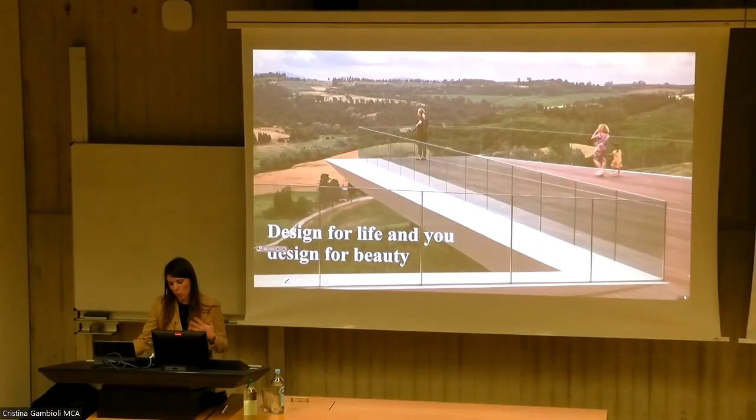We need to look at how we are working and what we are looking for when making this research. We are working with a group of architects, part of them artisans and part of them people using software like Grasshopper, because we think that with time we cannot just make architecture through artisans, through models, through the other ways we used in the past, using the model shop that we have in our office.

But now, when we have to respond to all the questions asked of us as architects to build big buildings and not just small things, we have to deal with sustainability, and sustainability means making a lot of research, being curious, being an explorer, and always trying to deal with new limits, new constraints, and to go ahead with all these problems.

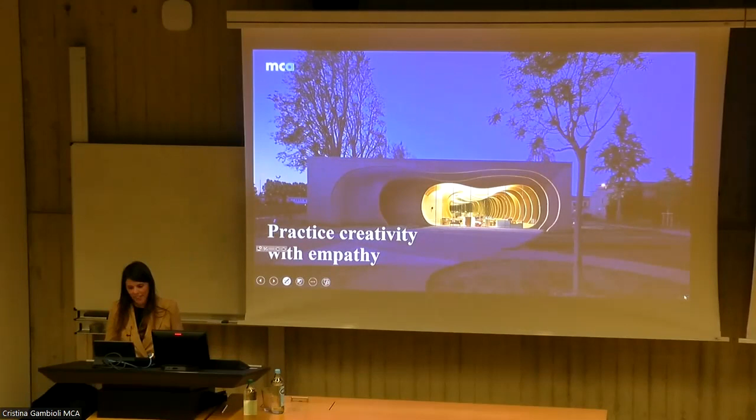creativity with empathy. What does that mean? Because for us, creativity could be something really dangerous, because it's a word that can be really crazy and furious, always about conquering new things. But of course, if we put these words together with empathy, thinking about what the clients want, what research we are looking for, what our goals are, and even what the people who will live there will need, then we can start our research and reach our goals. That's why we always have to deal with sustainability, looking from each angle.

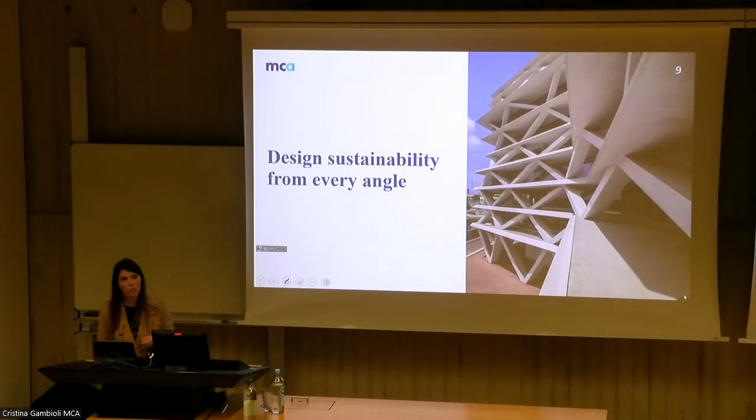So, looking from several angles, taking constraints and limits as a new challenge to find something new. This sentence is really important for us, because we always have to research the meaning of beauty, the beauty for our times.

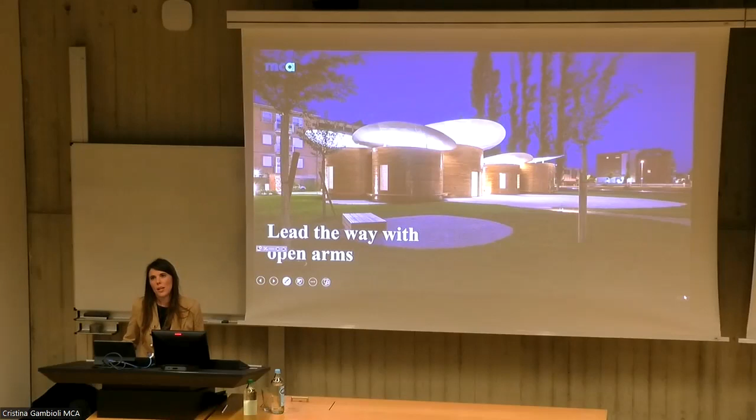So that means we have to think about building a timeless architecture. Something that in the future someone will look at and think, okay, this architecture was the response to what was happening in that exact moment, the perfect meeting between the shape, the problems of the environment, the people living in a place, and the nature. This also means we always have to go ahead and get new goals, new challenges, always open, because limits always push us to build better things, and we have to be curious as well.

During this time, the meaning of sustainability has evolved, and we have gone ahead a lot of steps, especially in the last years. But we have to always think that when we build a building, we are using energy, and when this building is lived in, it's using energy as well.

In the last years, we've made a lot of progress on the meaning of having a building that uses less energy during the time it's being lived in. But we didn't really focus attention, all around the world, on what it means to build something with less energy.

So we started thinking more about the meaning of vernacular architecture. In the past, they couldn't really use energy, so that meant they had to find materials in the place where they were living that they could use because they were already there, and they always had to find strategies that could work with the environment they had at that time.

Nowadays we have a lot of technologies helping us save energy, but in the past that wasn't possible. That's why we are always trying to be curious and do research into the meaning of vernacular architecture of the past.

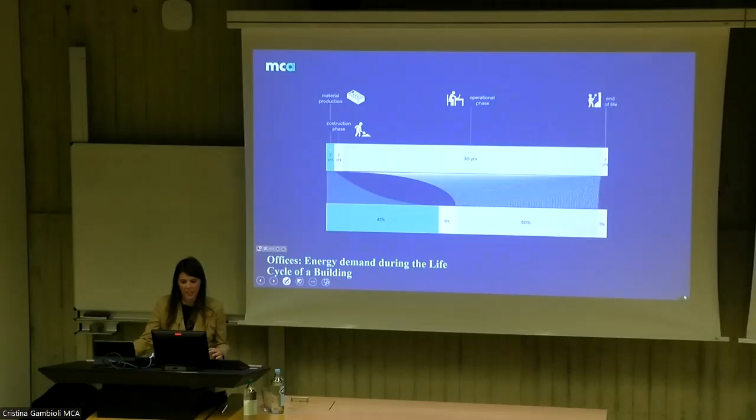We see that the ancients were always really intelligent, because they were really good at finding solutions to build buildings with less energy, and at the same time really smart buildings that didn't use energy even during the life of the building.

This graphic shows us that at the beginning, in the really distant past, they were building really intelligent, really smart buildings, CO2 neutral, because they were really using what was already there. Then there was a point when we started with technology and stopped building buildings that were so good — a big change happened.

Then in recent years, we are trying again to build up what was built before. That's why during our studies and development of architecture projects, we are always trying to go on a journey about what was done in the past — every project we do, we try to think about what happened before.

How, in the past, the people and civilizations that were here could maybe give us some thoughts about it.

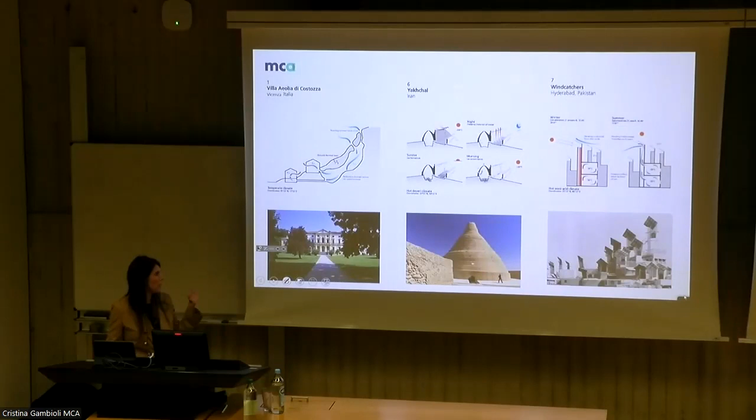We'll look in detail at the wind catchers in Pakistan, because they were the inspiration for one of our projects that I'll explain later. These are all examples of architecture that really used nature — they had empathy with the environment, and they were really well built.

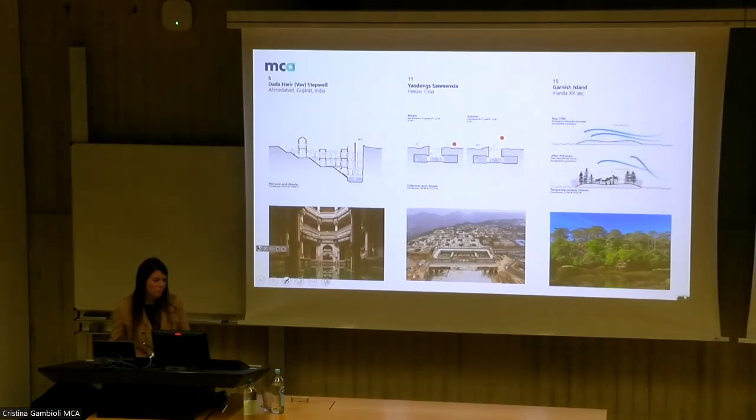That's why, even during the development of our architecture, in using creativity, we inspire our buildings on plants — trying to understand bio-principles, like how a cactus is made. It's in the desert, with a shape that's really particular, that kind of shades itself, so even if it's really warm, the sun can't touch the sides of the cactus. It has these dots that just catch water from the air, and that's why this cactus works really well in a desert environment.

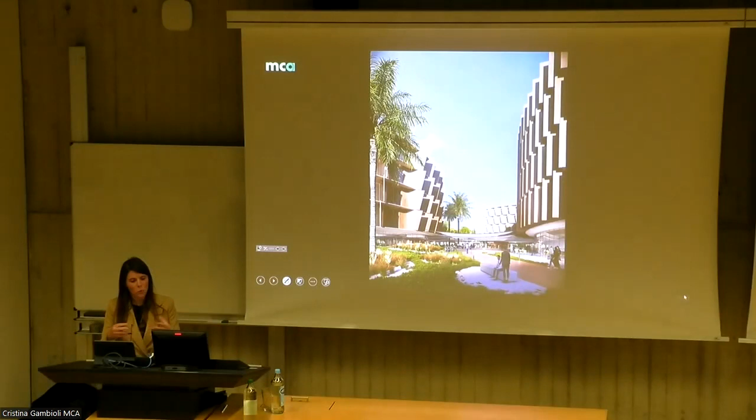We try as well to transmit this principle of nature into our buildings — trying to understand how plants adapt themselves to an environment, and transforming that into a building as well, using the same principle as the plants.

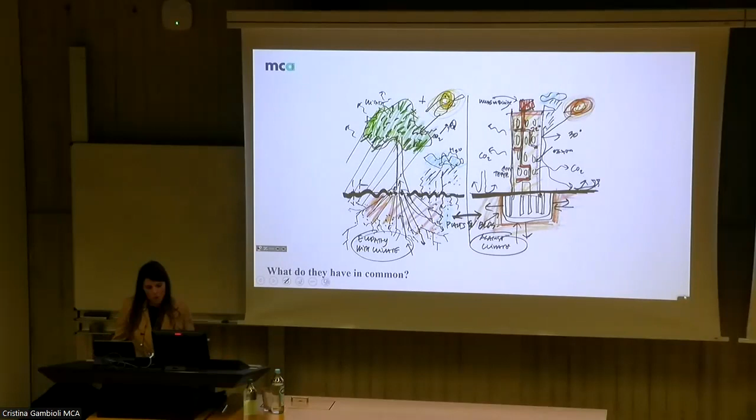And that's a little bit an overview about our philosophy, our methods, and how we try to keep working, being conscious that an architect is always leaving a footprint on earth. That's important to think about, even sometimes fighting against clients and other opportunities and business. But we have to think that these buildings will be there forever, so everything we are building and creating stays on earth forever. That's why we always have to make thoughts about what we are doing.

I will go now more in detail about some projects. As the first project, I will speak about the ARPAE headquarters. ARPAE means Regional Agency for Prevention, Environment and Energy.

When we started this project, the client specifically asked us for a sustainable office building, and they wanted really to meet the highest architectural and environmental standards. This building is in Ferrara, in Italy, close to Bologna, and was completed in 2018. It's almost 5,000 square meters, and it explores the relationship with performance, making it one of the first hybrid buildings in Italy.

It's just outside the city of Ferrara, and in this area we have a climate with two extremes during the year. In summer it's hot and really humid, and winter is cold and foggy. We can say that only in spring do we have a normal relation between temperature and humidity.

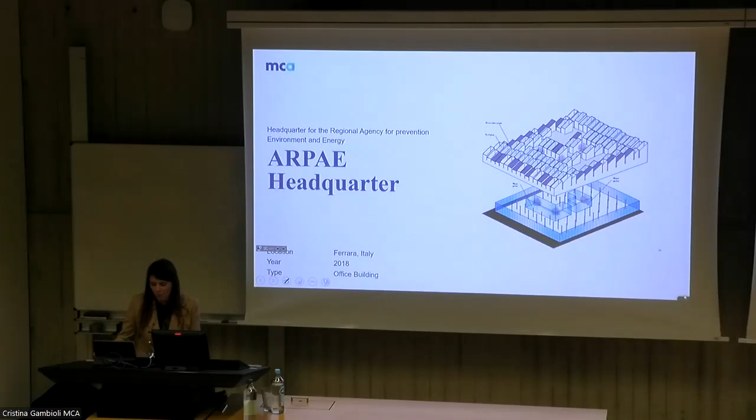For us, as I explained before, the definition of sustainability is not just connected with aesthetics, but especially the meaning is empathy with the place, with the climate, and with the people. So now I will bring you through the research that we did for this building.

We got inspired by the city of the wind, Hyderabad, in Pakistan, which really catches the wind. It's a city that was built in 1768.

We started long research, becoming curious and looking at all vernacular architecture. And then we came to this city, and we thought it could really be the perfect inspiration for our project.

We found out this city, as the name properly says, is a city that catches the wind, and this civilization was really smart. Without the technology our society can use nowadays, they invented really intelligent methods, using the shape of the building to get natural comfort inside without the use of energy.

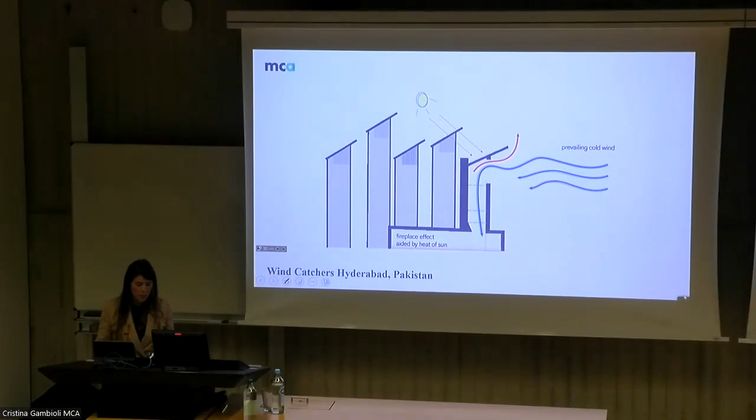Normally all these roofs are oriented toward the south, because in summer they have to catch the wind coming from the south, and in winter they have to protect, with this shape, against the cold wind coming from the north.

All these shapes have a sun shading system integrated on top of them. That means it's something a person can manually control and adapt to the necessity of the people living inside. So you have the possibility to use natural elements and adapt them to your needs, using this tool that lets you really catch them and bring it inside your home.

Normally they used to open these mangs during the evening, after sunset, because in summer after sunset you start to get a little bit of colder wind. This wind goes really fast inside and refreshes the whole house. Normally they stay open till 11 the next day, giving you during the day the possibility to close them and protect yourself from the sun.

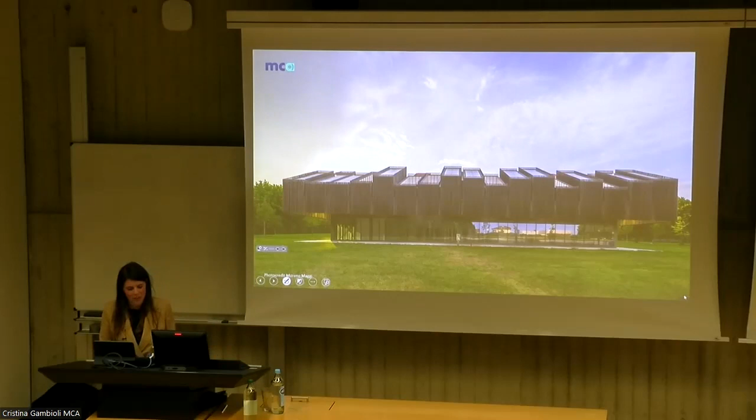We are pretty happy because we are really getting the goals we wanted at that time. As architects, we have a responsibility for what we build, and we have to try to build things in connection with nature, shaped by nature or ancient technologies, while mixing in today's technology responsibly and always exploring new opportunities for development.

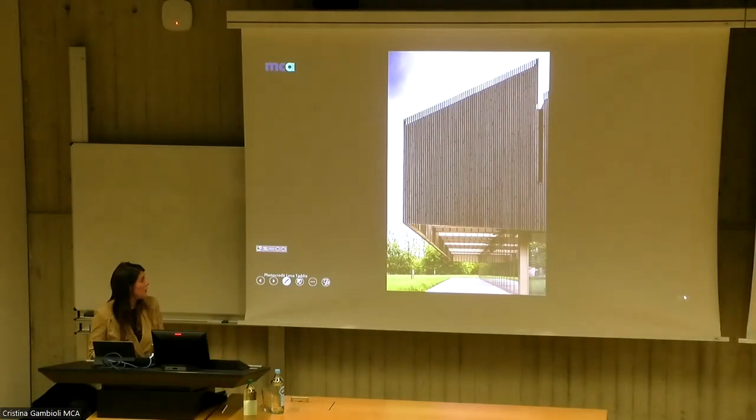The structure is completely made in wood, not just the facade but the whole building. Just another detail, and as you can see, it really matches the nature around it.

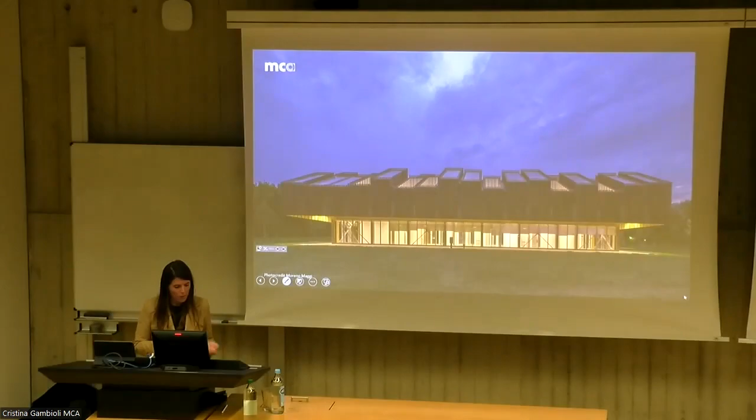As a connection with the building I've been speaking about, I'll introduce a new tower we're building in Milan. I don't know if you've heard of the Unipol Tower—it's in Porta Nuova, in the new development area in the city center of Milan.

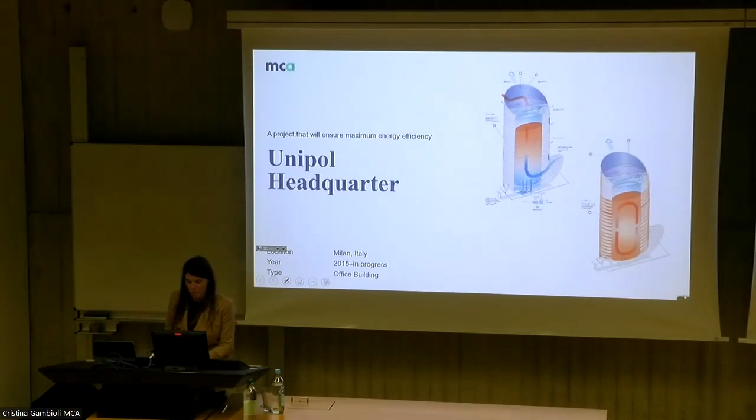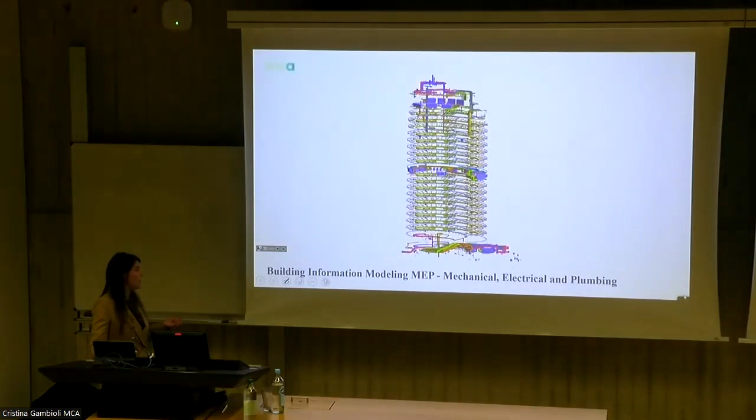This is close to the vertical forest. I wanted to quickly introduce this because it uses the same principle I spoke about in the other building, ARPA—it also has an interior patio.

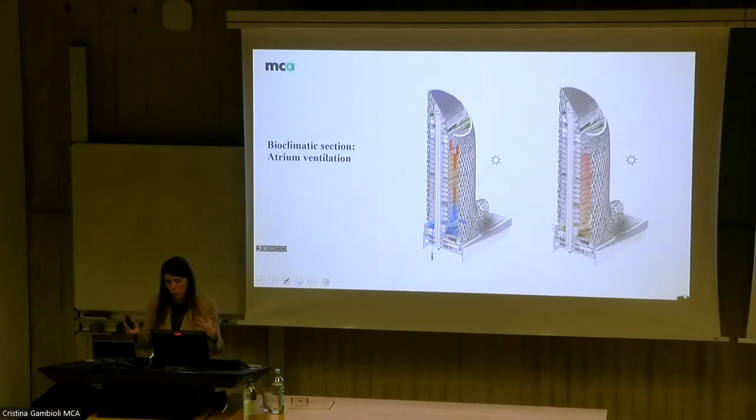We tried to reproduce at the same time, even in this building, the possibility to have a chimney effect. So we built a first layer of facade that is not a warm facade, and inside we put a patio that goes across the whole building from the main entrance to the top.

This patio takes the warm air from the bottom and brings it to the top, carrying it away. The other part you see from the other side are just offices, and exactly at that point you have the real facade.

So the space between the real facade of the building on the left and the exterior facade is theoretically a patio that you don't have to heat, which means you save a lot of energy because it's not a place you need to use energy to make comfortable. That's important because it was a really big space, and we didn't want it to use energy.

We took on this challenge and repeated this chimney effect, giving us the possibility to have a really huge atrium that goes across the whole tower, about 130 meters. As you can see, we fight for our beauty while keeping environmental strategies and sustainability strategies in mind.

On the top, we decided to have a sky garden, a kind of hanging garden that is always refreshing, bringing nature inside the city.

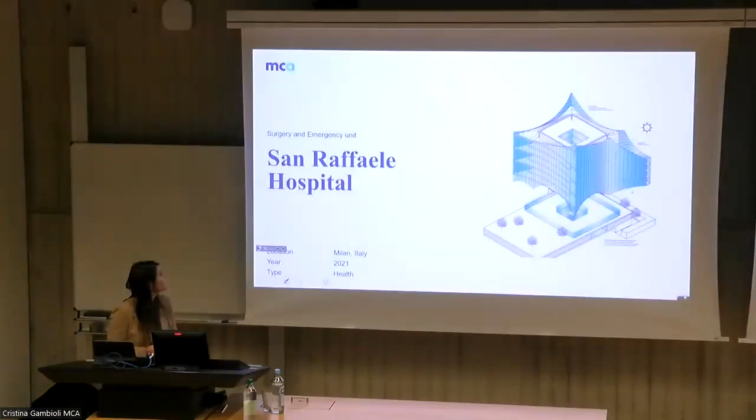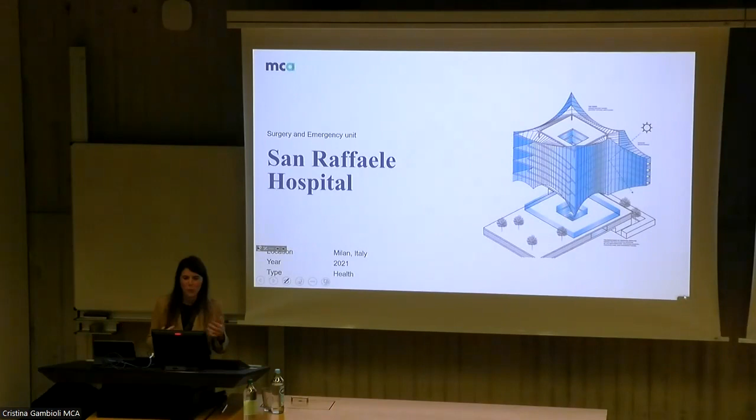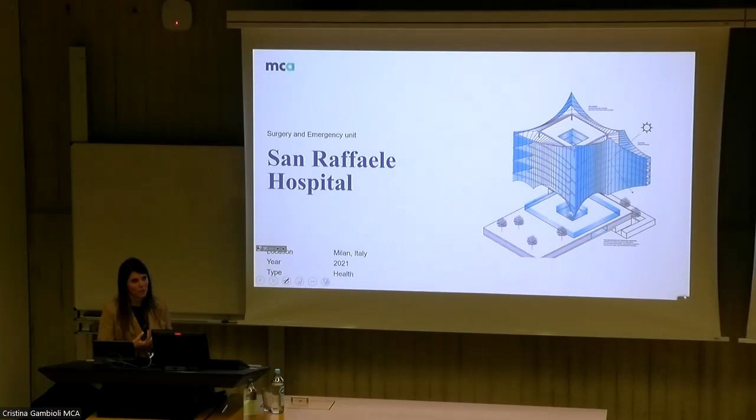To give you an overview about the meaning of sustainability across a lot of our buildings, I will quickly introduce the Hospital of San Raffaele. It's already built, in Italy, in Milan as well. As architects, we face a lot of challenges. We were speaking before about an office building, then a tower for offices, and this one is a hospital—it's really important to always fight for beauty, especially in a place like a hospital, because it's bringing people together.

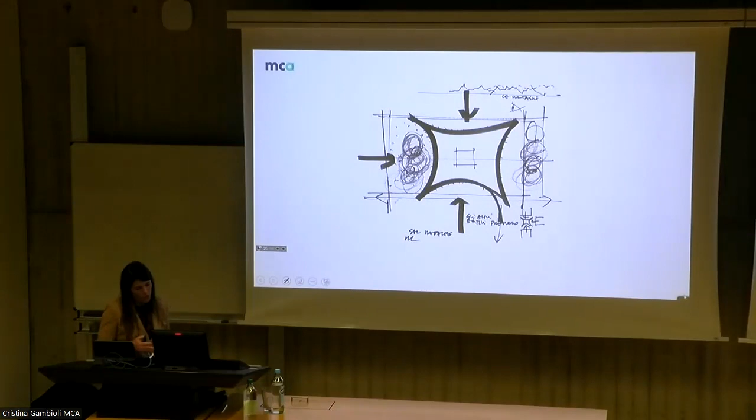We developed this concept for the hospital, starting from the shape and something that could bring something special to the building. The idea was to represent an iceberg, something frozen inside the building. But we also wanted to use environmental strategies, and that's why we used this facade with a lot of vertical depth elements to make shadow on the facade. That's always a big deal when you're building a glass house, because glass, especially in Italy, is really difficult to deal with—in summer it's almost impossible to live inside, and you need a lot of energy to cool it down.

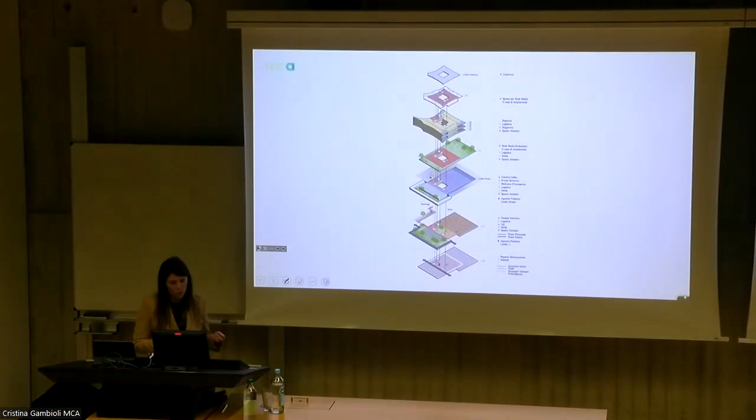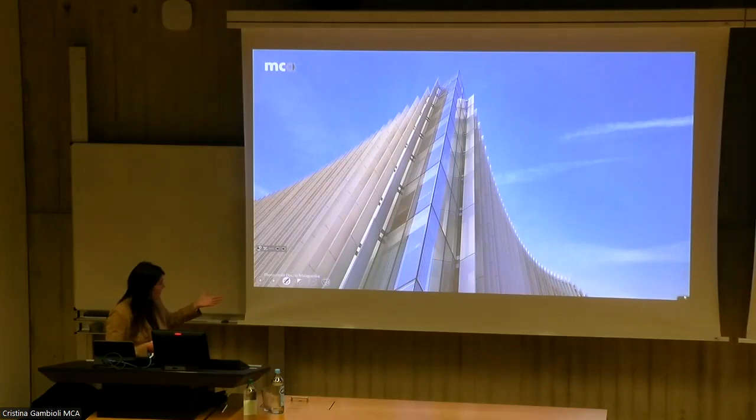We've been looking again in recent years at the renderings of this building, which we planned almost 15 years ago, and we were really surprised, because the building turned out far better than the renderings we had done before. Often it's the other way around—renderings are a way to dream, and when we actually build it, it's always really difficult. But here we have to say that with this building, we really reached our goal, and we managed to make something balanced and well done for the goal we set for ourselves.

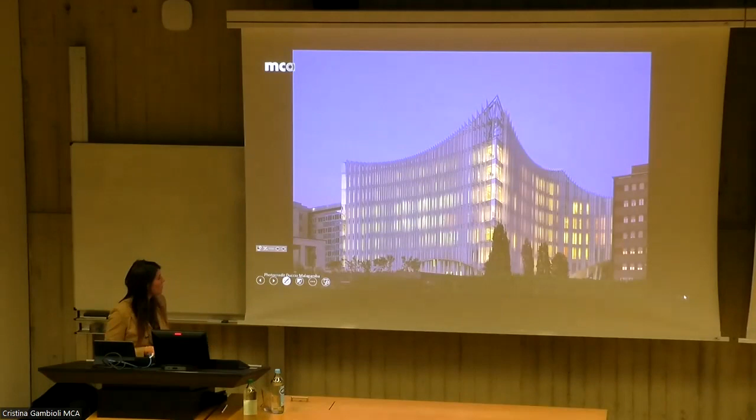Now, to change the scale of the project a little, I wanted to show you a really small residential project, to understand how we use this technology even in the residential area. This building is in Monza, a city close to Milan, in a really important location because it's on the main axis of the Villa Reale, the historical palace. It was really difficult because we had to deal with historical reality, and a lot of limits, since in Italy there are many controls about what and how you build, especially in historical areas.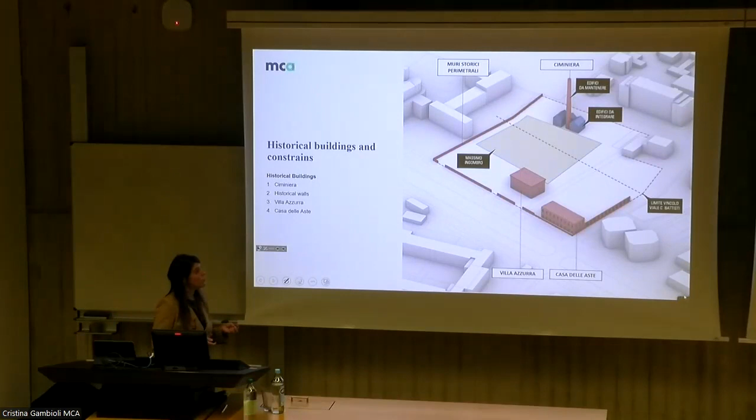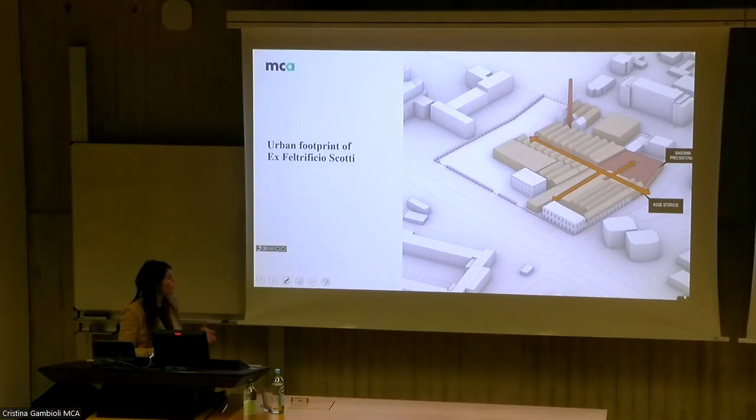So we started studying the urban footprint of the factory that was there. And we decided, okay, we added a couple of axes and we added a principal shape. And so, okay, we understood what we could build there.

For sure, we had to give a lot of importance to the main buildings on the front because we have to keep the historical reality. And we had to keep the green, with the special trees, exactly as it was. So we decided that was the shape we could build, because it was really limited. And so we decided how we can really create a living garden here, something where you have the feeling that you are in an historical garden, but with new technologies and new, maybe organic, shapes.

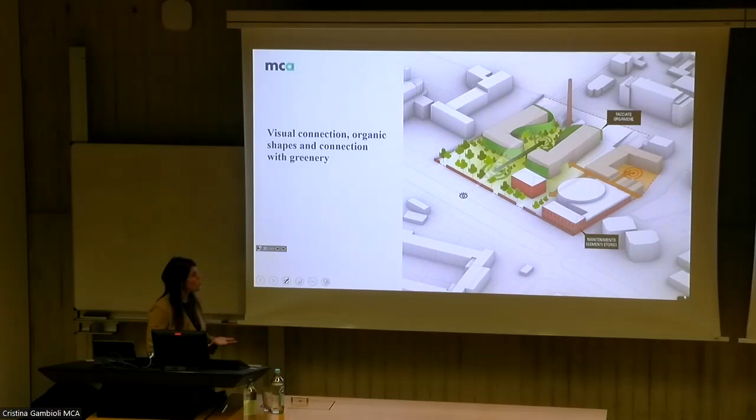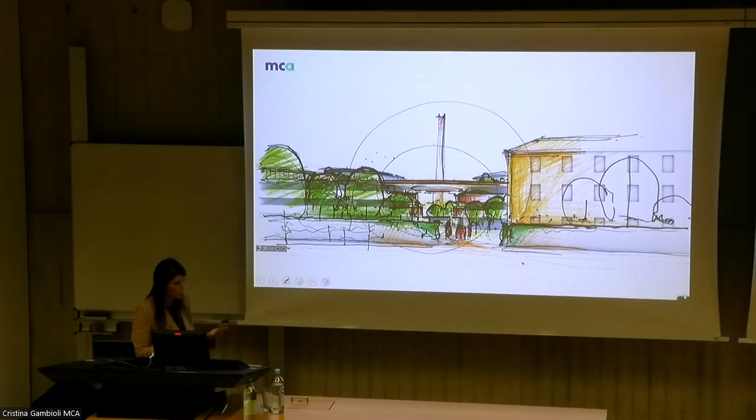And so that's why we started to think about it. We have to keep the historical walls. We have to keep these green trees. We have to keep the Villa Azzurra on the right. And we have to build a building that doesn't take away importance from this main chimney that we have in the middle. And we want to keep as well the industrial reality, the industrial memories.

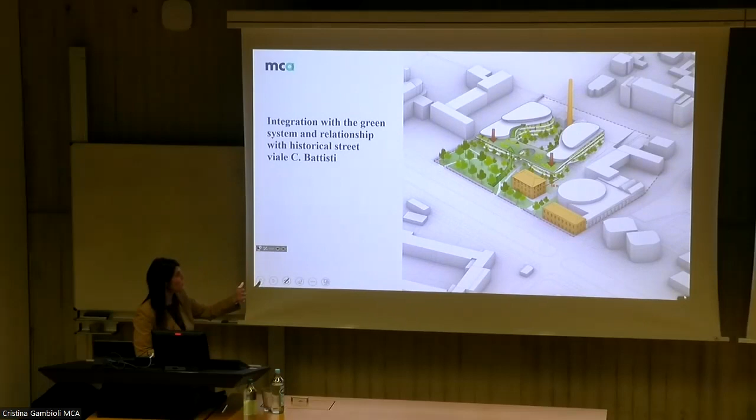So we started to move the volume and began using organic shapes as much as possible, because we wanted to reinterpret how nature is made. That's why we decided to make this organic courtyard in the middle. And on the other side, we didn't want it to be too high, because from the main street you could see that the building is too high, creating a not-so-good impact. That's why we decided to lower the upper part of the building and keep only the other side higher, as a way to hide it a little bit.

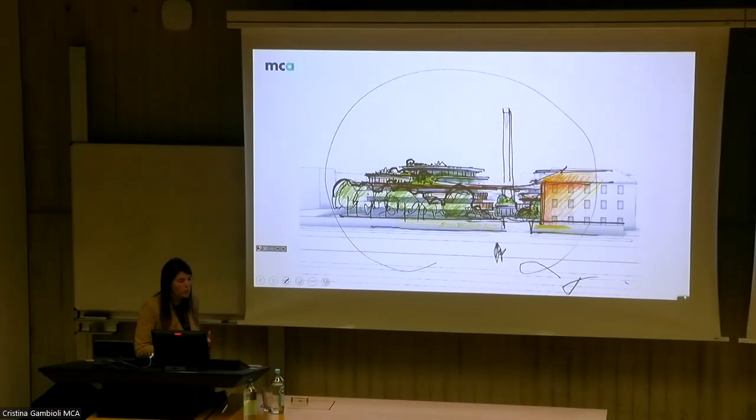And then, another way, we wanted to have a picture where from the top you have the feeling that you are in a garden, so that you are not really making an impact on the place where we are building. So we really wanted a kind of green carpet. That's why we grew this idea of having some private gardens, and of course some public places, this part connecting the two buildings, trying to have as little as possible a visible footprint of architects and humans of nowadays.

And that's why, after all this research, we are trying at the moment, since it's a construction site, to build a living garden and some hanging landscape, trying to reproduce what was there before, with as little impact as possible with this architecture and this park in front of it, and also trying to have several layers of garden. The first garden will be accessible to everybody. The second garden, inside the courtyard, will be accessible just to the people living there. And then the other gardens on the tops will be more for the people living in these apartments.

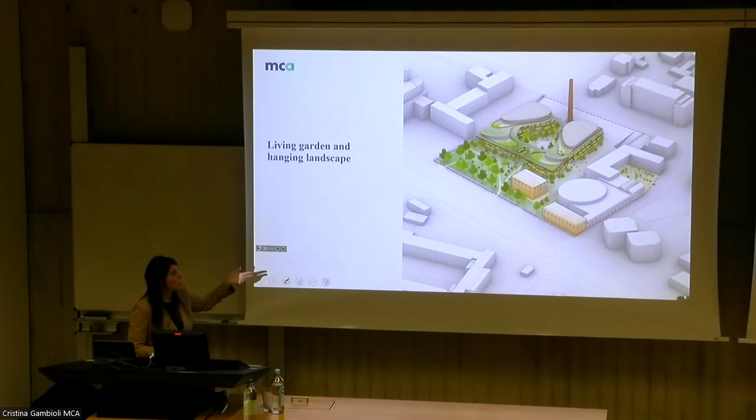Then, of course, we are dealing with necessary new technologies, and on top of the two parts we had to put solar panels. But as you can see from the top of this picture, even in comparison with the parts of the landscape around it, we try to connect the parts on the right and on the left with as little touch as possible to what was happening there before. That's the footprint of the building we are doing. The part in the middle is already at the construction site, and on the right part we are still working, because we have a second stage.

And so about the sustainability concept, I have already explained several of them, but we can make a review. We are trying to work with deciduous trees, so that means that in summer they will be full of leaves and will make shade on the bottom of the whole park. And the other way around, in winter, they will lose the leaves, which means you will have more connection with the sky and the sun can pass through them.

Of course, we have evaporation and evapotranspiration effects from the vegetation, because in summer it's really important to have a bit more humidity made by the vegetation. We also have evaporation of water thanks to this small water park that we built.

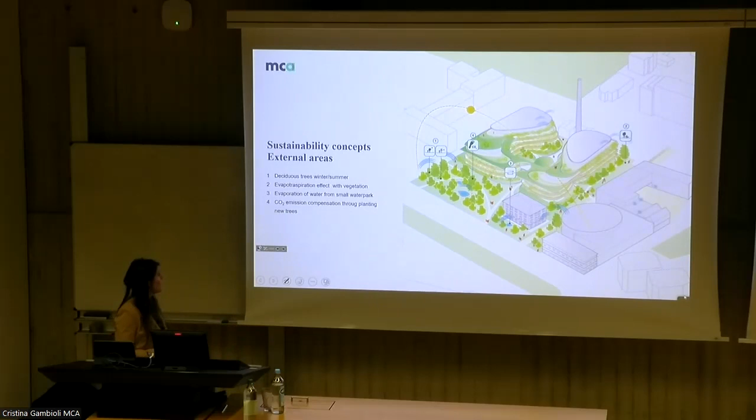In this main entrance of the building, we are trying somehow to make a CO2 emission compensation through planting new trees that, as you have seen in the pictures before, was completely razed with no trees.

And about the building itself, we will have a facade that is really shaded thanks to these big, generous terraces. The material of the terraces remembers the nature of the place and the industrial reality, using cotto, or bricks.

Then we will have solar panels on top of it, natural ventilation, reuse of meteoric water, and the regeneration of existing buildings.

For example, as we said, the Villa Azzurra, the chimney behind—it's always something we consider when regenerating existing buildings. We are not creating new ones, and we don't have the problem of how to deal with the waste of the building we are demolishing.

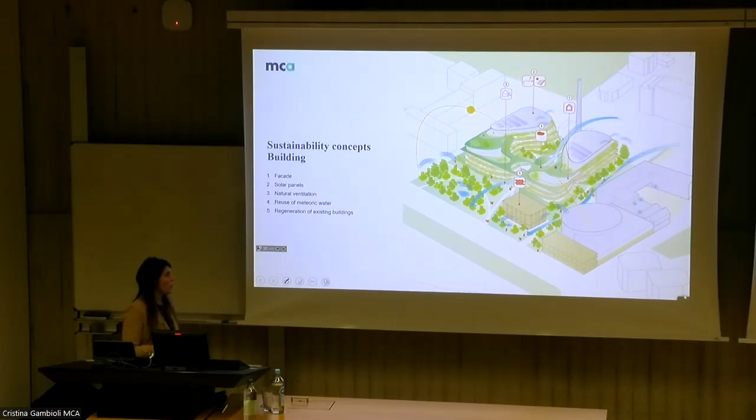This is how we work. As I said before, we still try to work as artisans, so we do a lot of models until the moment we find the perfect shapes. And that's the main picture of the building from this main road.

And the top view of it as we are building it. And this is a view of the terraces.

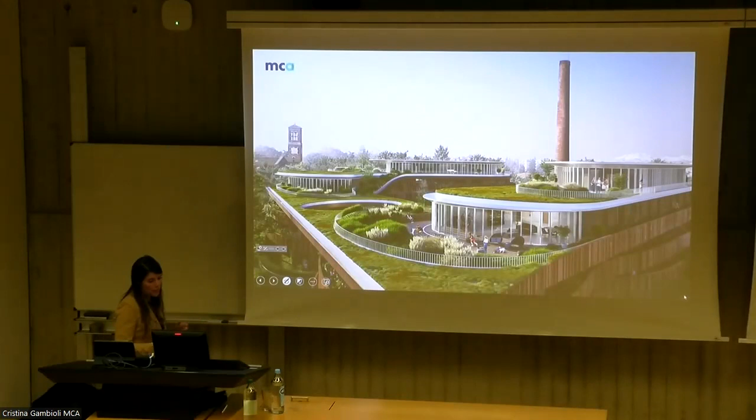Of course, all this glass facade will be provided with shadings to close them and give more privacy, while at the same time protecting from the sun in summer.

We also had to study the small building around the chimney that was a restoration. We try to always use red brick material, inspired by the tones of the chimney. And we try to keep the volume as pure as possible to remember the industrial reality of this place, but shape it in contemporary ways.

This is another picture of the interior courtyards—when you are working there, you have the feeling that you are embraced by all these shaped balconies.

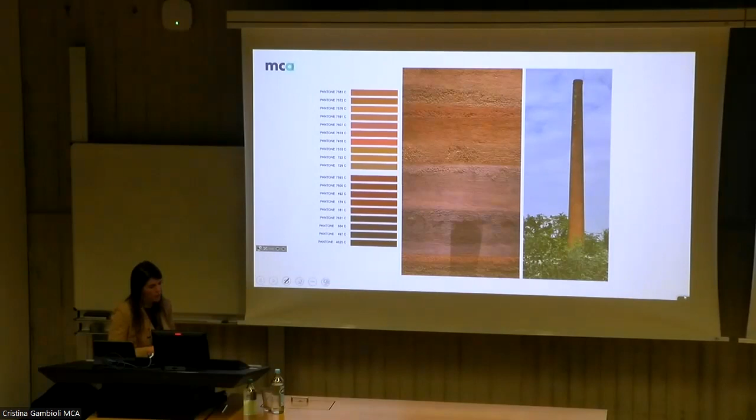This is a study we've been doing with the chimney to find the perfect matching colors for all the balconies, and to have these ceramic parts of the balcony that are really deep, because that helps so that when you are sitting inside, you can look through them.

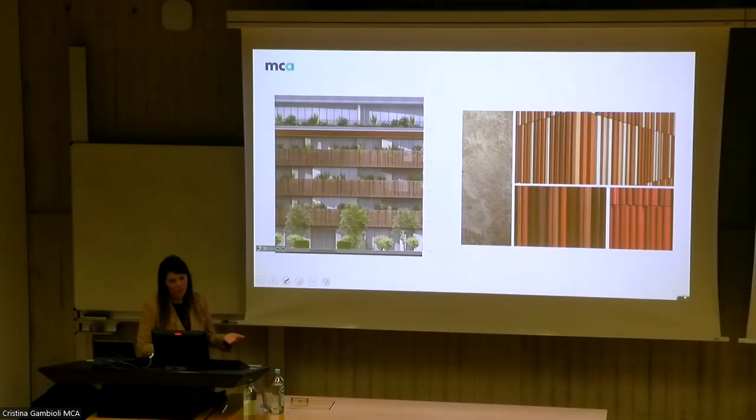But since they are all curved, when you are walking at the bottom of the building, since they are really deep, you cannot see inside because it's like they are covered. This way you can give privacy to the people living there.

These are some sections and some color palettes that we have been using. And finally, this is the final picture.

This is something I will explain really fast—another project that is finished, just to show you how we work across several types of buildings.

This is a cultural building in Milan, and it has already been built. It's under the earth and under a historical building in Milan, so that was a really big challenge.

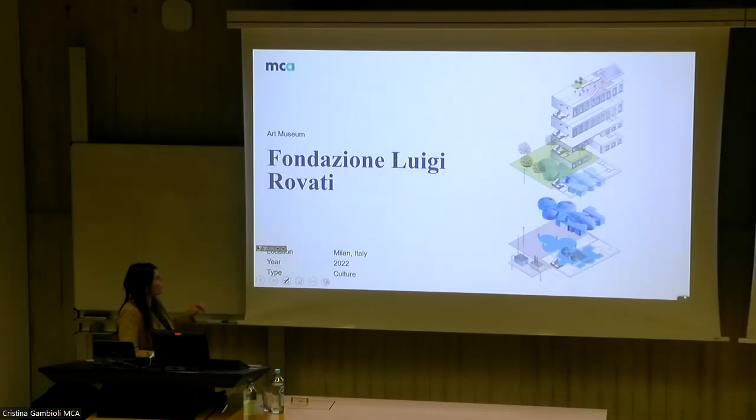Our client told us they wanted to have a private collection of Etruscan vases and Etruscan art. We had to find the right concept to interpret this and bring all these vases into the right place. Of course, that part was really focused on the experience of the visitor going there.

So we tried to understand how we could place these sculptures in the right way, to make the person going through observe them in the best possible way.

And these are some studies we've been doing, even studying Etruscan architecture, trying to understand how we can deal with this vernacular architecture that is the origin of the vases and the art we are putting inside this building.

So we started to make models to understand the perfect shapes. We sometimes mix methods—making them with styrofoam, then with the computer using parametric software, and then building it again. That's always a really important process for us.

Even the architect Cucinella always uses models as a kind of communication tool between us, to understand if we are going in the right direction and to experience the building as much as possible.

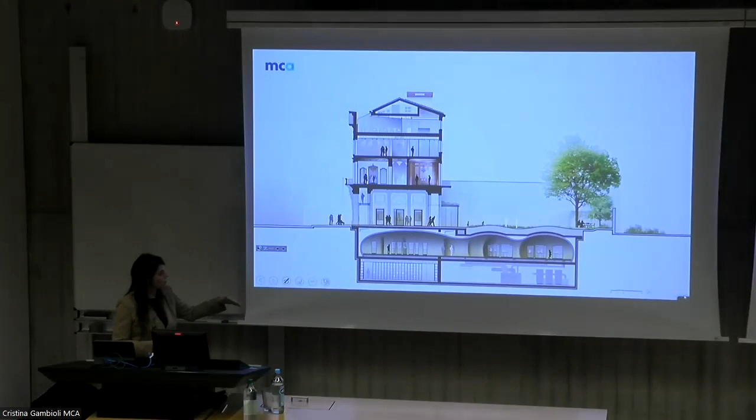This is the part of the museum that we had to restore. We tried to use more contemporary colors, but keeping always the essence of the historical building. And then under the land, as I explained before, we have our museum.

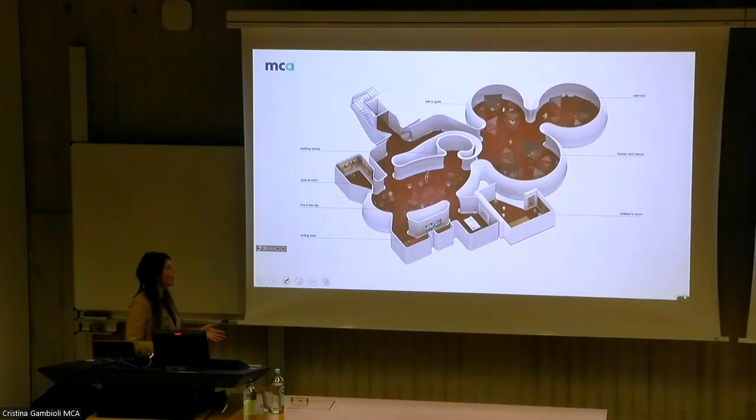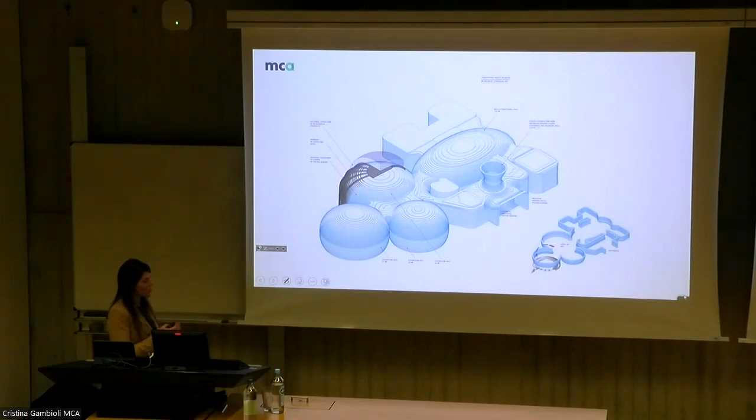So the visitor arrives there, takes some stairs, goes to the bottom, and has an experience about what is happening there, trying to live again how the architecture of the ancient civilization was. We made everything by stone.

We use software to cut all the stone this way to have this effect. We try to keep everything as clean as possible, and we use some system to bring light inside as well, from this garden.

And of course, it was a perfect study about light, how we could admire as much as possible all these art pieces using natural light and artificial light, and trying to find the best balance to give the sensibility of some vernacular architecture.

Then I will introduce the small project, a church that we have been building in the south of Italy. It's a really small town, and it was something where we were like, okay, we have to do this small church.

How are we gonna do it? It should be something small, but following all the rules of the Catholic religion. So it was a challenge as well.

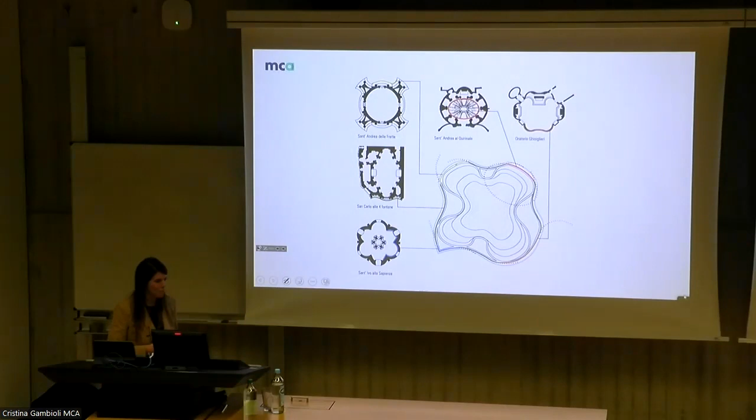So okay, we started again studying architecture, starting from the best masterpieces in the world, and trying to find the perfect shape. And then it was a surprise, and we built that thing.

Of course, we had to keep some religious signs because we couldn't avoid putting them, and that's why we decided, for example, to integrate this cross with the shape of the architecture and to make hidden the entrance of the building. That was something you have to find, and to keep the volume as clean as possible.

It cannot be on the same level as the visitors of the church, the Catholic people going there. You need always to have a cross inside. And as all the architecture always does in all the churches we have been seeing along the years, the light is the most important thing you have as an architect to play with.

Because we really wanted to have a filtered light, something that when you are inside, you really have the feeling that it's something special, and you are really having this connection with the sky, with the light, and with what's happening outside, emphasizing the meaning of the religion.

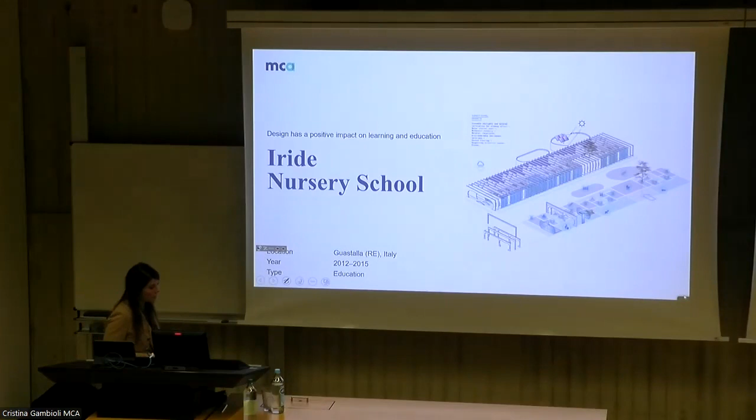A participatory design project is this Iride nursery school. Maybe you've been hearing about it because it's really famous. We started from the fairy tale of Pinocchio that everybody knows, and the experience of going inside the whale at the end of the fairy tale.

We had to make this nursery school, so we thought about what's the most important experience a kid has when he's a child, and what is the spirit of the fairy tale. We remembered that when Geppetto was inside the whale, it was a big issue, a big problem, and it was something that for sure shaped our childhood. So we started to think that we want the children going to this school to live something important for them.

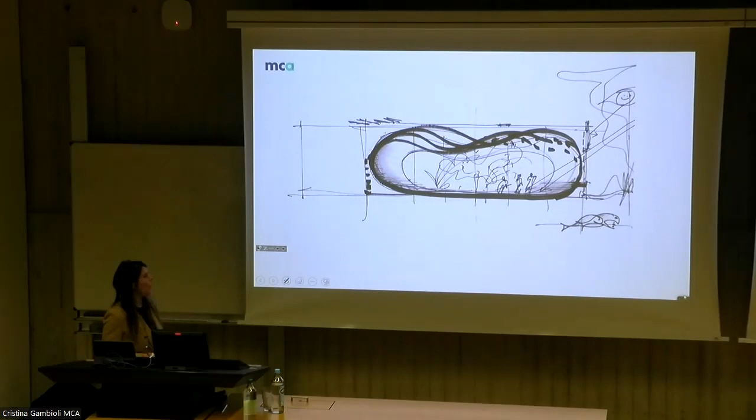That's why we started to develop our architecture based on the fairy tale of Pinocchio. We made some sketches with Mario. We started speaking with a lot of teachers to understand their methods, how they want to deal with the children, new methods, and to shape the architecture with the leads of the teachers. After a lot of dialogues with the municipality, the teachers, and the children, playing with them, we built up this building that should remind you of the whale and the story of Geppetto.

We are playing with light. We are making everything in wood, in the middle of the woods, so it's something that gives you a strong connection with nature. You are inside, but you have the feeling that you are outside. And when you move from one side to the other, you are really connected with the shape of the belly of the whale.

And somehow we also made this floor that was coming up to help the children play as much as possible and really live this experience of being inside the space. And of course, we had to deal with a lot of design elements and things that are necessary in a kindergarten.

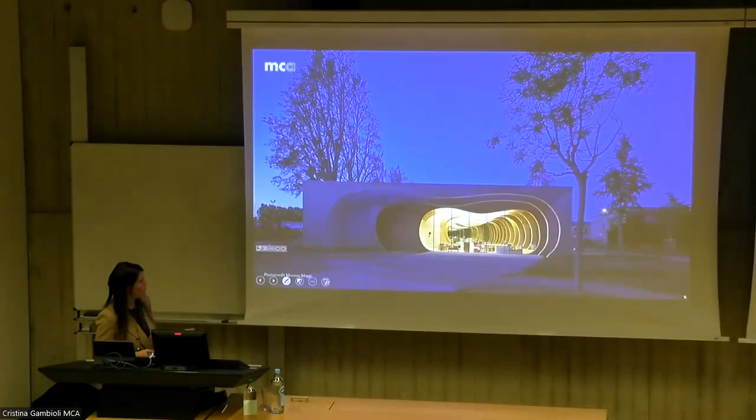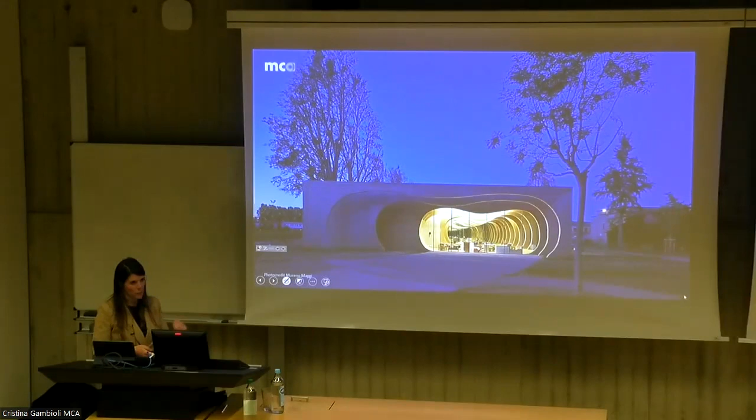At the end, we came up with this building that isn't so big. It's a small thing, and it's already pretty old. But still, we think it's helping us because it's a little bit the essence of how to build something that really has a strong empathy with people.

Now I will go to the last project. I wanted to show you that inside MCA we have an R&D, Research and Development department. That's really important because every time we start a project, we keep the concepts that R&D is developing. All the time, our unit is looking for new vernacular architecture, new technology, new ways of having a connection with the place where we are building something.

That's why every competition, every contest, every new client that comes in always goes through our research and development unit. Not all architectural firms have a unit like ours, because of course it's an investment from our company to have this unit, but for us it's the only way to really build something useful or try to leave a good footprint on Earth. That's a little bit our mission, because we always have to think about what we are building. We have a social responsibility, and we always have to think about what we are doing.

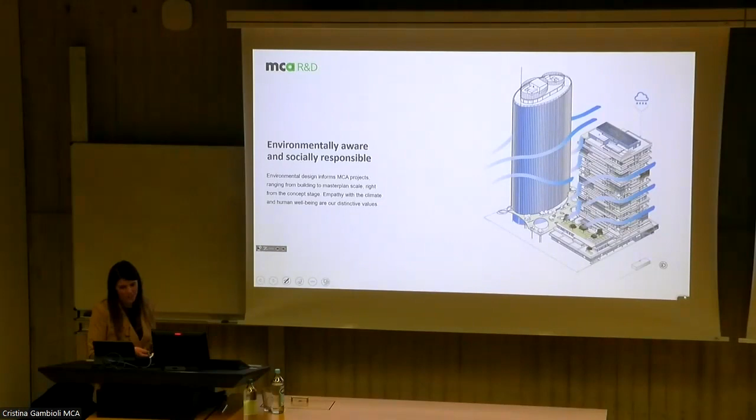Now I will explain in more detail the project of TECLA, which was also really famous last year. It's not a project, I have to say, first of all, but a prototype—a prototype of an eco-sustainable house, 3D printed entirely from raw earth. As far as I know, it should be the first prototype built through 3D printing technology using raw earth. MCA, together with WASP, a worldwide society meaning World's Advanced Saving Project, completed this prototype 3D printed with local earth.

This approach started from an innovative and pioneering collaboration between the two firms, and we worked closely throughout the project design and construction possibilities. Even in this project, we thought about how we could bring vernacular architecture and its technology into this prototype, into this process. We were inspired by the history of one of the cities of Italo Calvino—maybe you've read some of his books—one of the invisible cities. For this building, we drew inspiration from the city in continuous construction.

Why TECLA? Because the name evokes this strong link between the past and the future. We are combining a material that was used in the past in all vernacular architecture, something that should remind you of something really timeless, and we are building it with the technology that we have now in the 21st century. So it was kind of the perfect mixture between our researches. That was why we were really happy about developing this project, because it was really a good connection.

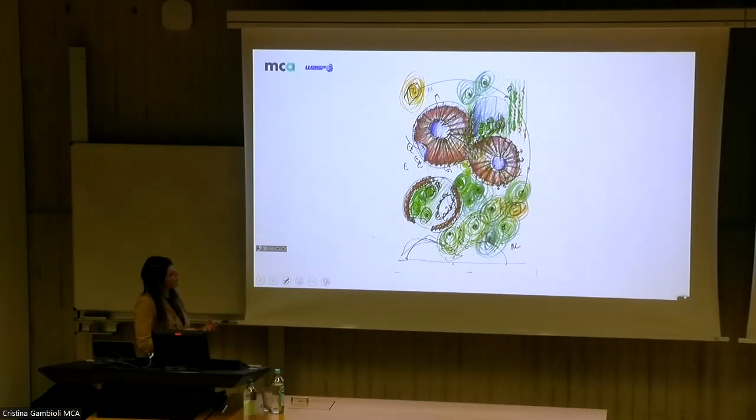And then as well, of course, it was important to understand how we are going to build it, so with which kind of earth mixture we want to use. And so we started to think about not just directly building a house close to Bologna in Massa Lombarda, but we thought: okay, let's try to think that we want to build 4 houses. We are going to develop just one as a prototype and build it, but let's think that we want to make one with hot and arid climate, another one in Mumbai with hot and humid climate, and another one in Bologna.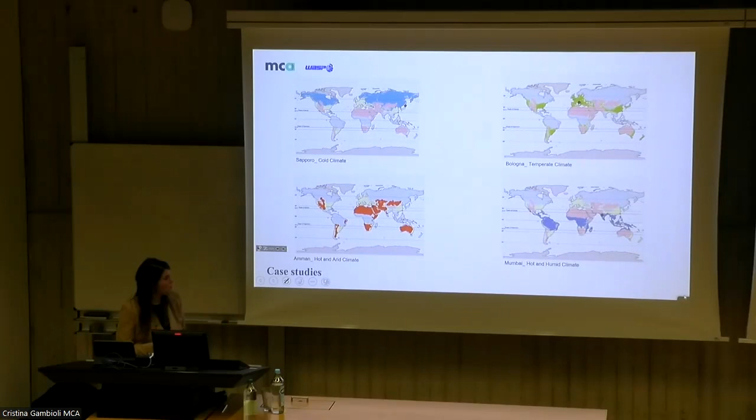Together with our School of Sustainability that we have inside, we started to make a lot of studies about which shape would better fit with each climate. That's why we developed some shapes that will work better for that climate. The one on top is the one that we chose for Bologna and for this kind of climate. That's why we started to reproduce it, to understand some focus about how it could theoretically work as a city for it, or a theoretical small development of it.

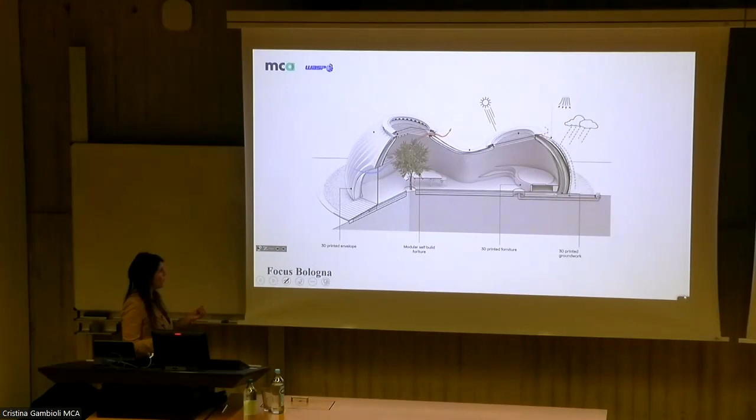And then, of course, something we had to think about as well was that we had to 3D print this envelope. So we had to think really about how the wall of this envelope would be made — the frequency of the infill pattern inside, the depth of the walls, and the part regarding insulation as well, and all this ventilation part.

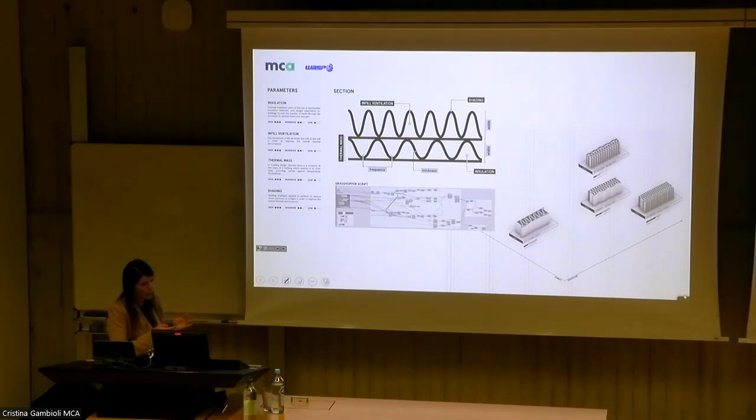So we made, together with the help of Grasshopper scripts and WASP, of course it was a big challenge because we had to think about the structure, since we should make something buildable, at least for a prototype. We had to think about the shape that brings a plus to building it, and about thermal mass, ventilation, insulation, and shading as well. We made several tests and found the perfect balance to have all these elements together in the same thing.

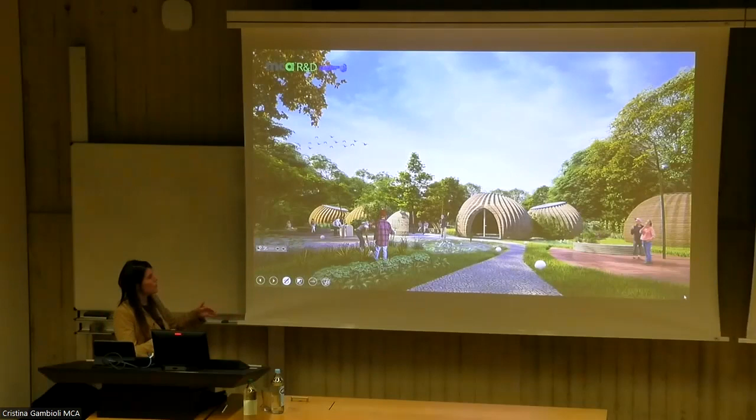This was a render we made just to understand how it would be. We did a lot of tests together with WASP to have something that could be built really fast with the technology they had and everything. So it was a little bit of some ideas.

Then together with WASP, we developed, or they already had, a machine with 2 arms that was building at the same time one part and another, because it was really important for us to win the challenge to build this house in less than 200 hours. And we made it. We are still studying more about this house, but we think, or we want to think, that this is just one of the first steps we are taking as a society to develop something new, something that could be challenging for this century.

I will put a small video, I think it's 1 minute, but it will help to understand how we build this house and how the wall is made and everything, as I explained.

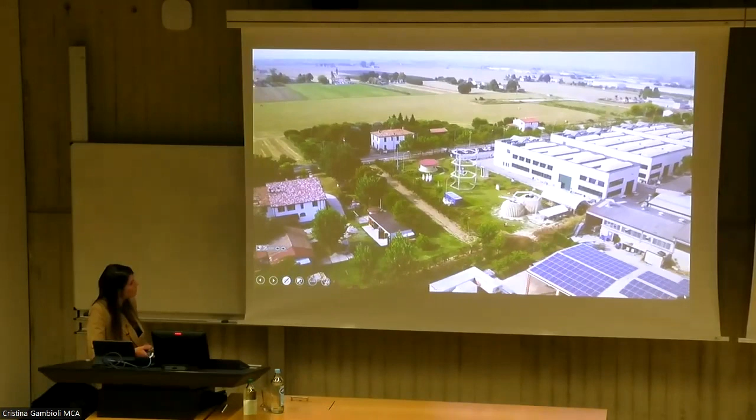So that was our final prototype. It was this home of 60 square meters with the kitchen, the living room, and a bed as well, and all the services.

We tried somehow to build the furniture inside when it was possible, using 3D printed raw earth as well, for example the bench you can see on the right or bottom part. When we had to use furniture, we didn't fully reach our goal because we couldn't 3D print all the furniture inside, but at least we aimed to use some furniture made with recyclable materials, or reused, to keep this circle closed of recycling and reuse as a circular house model. That was really important for us, to transmit this message of trying to build something that could be reused.

The mixture of earth, as I said before, was studied to understand, even for each climate, how deep and how thick the walls should be, because of course every earth from every land, from every singular place, is not the same, and we used it as such. That's really important, because in this concept we use a material that was already there, and if tomorrow we don't want this house anymore and have to destroy it, we can destroy it, and nature goes back to nature, without a bad impact on our environment.

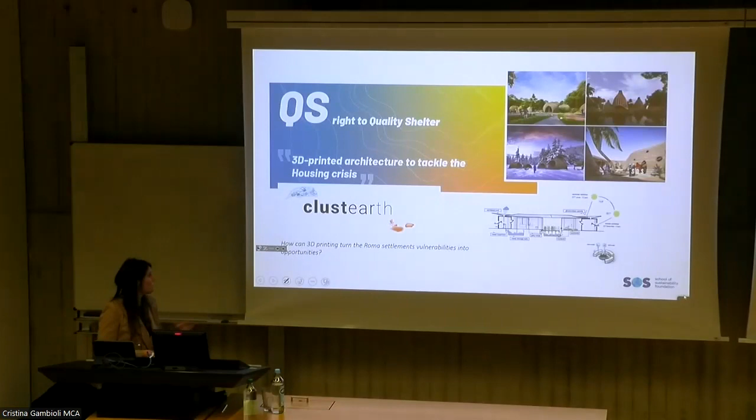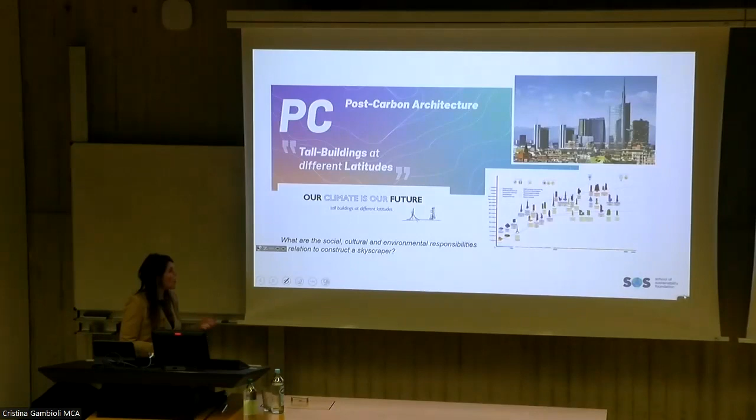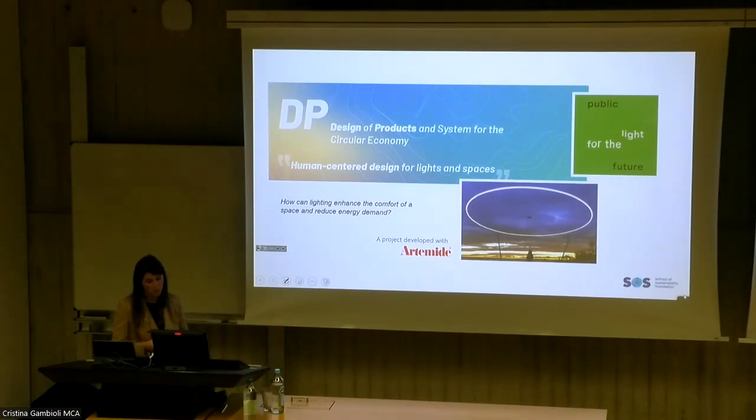So these are some ideas that we are always developing through the School of Sustainability, other kinds of houses. We're pretty happy with the results, and we have a lot of firms, especially Italian firms, collaborating with the school to make prototypes and small projects.

For example, some products like lamps and other things. So we are keeping a lot of student activities together with them. There is a strong exchange between our office and this school, and that's pretty important for us.

And these are all the partners that are working with us. Closing our lecture, I wanted to show you the last video about what we call fields of beauty, because we had the opportunity to work close to Bologna on a really small project, because unfortunately a couple of years ago, 8 years ago, there was a strong earthquake close to Bologna, and it was a big issue for the people living there because a lot of people lost their homes.

Funds were not coming, and of course they lost the school. They lost especially all the places where people would gather. That was something that didn't help improve people's mood, because after an earthquake you really need to be close to the people and give them the opportunity to get together again, to have places where you can still believe you can go into a building and enjoy it together with other people, not avoid being inside.